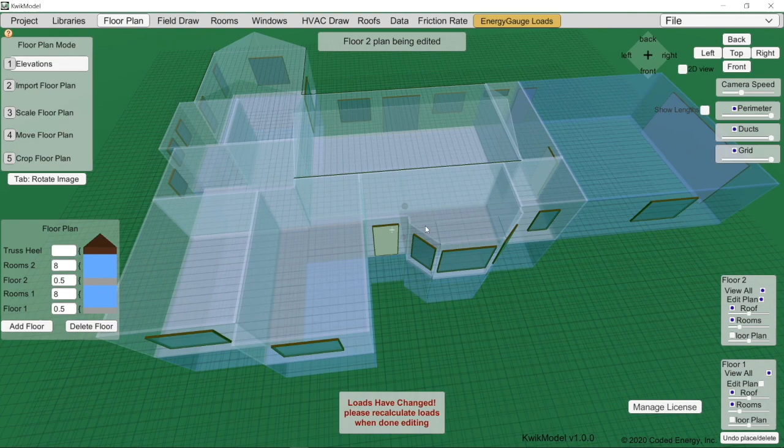The first thing you're going to have to do is place an air handler in the house, and typically a basement system like this is going to have an upflow unit down in the basement. So somewhere down here in the basement there'll be an upflow unit.

The best way to do that, to keep things kind of clean, I'm going to turn off the first floor, the main part of the house, go over here and just turn everything off so we just see the basement. Turn off the grid. Okay, so there's our basement.

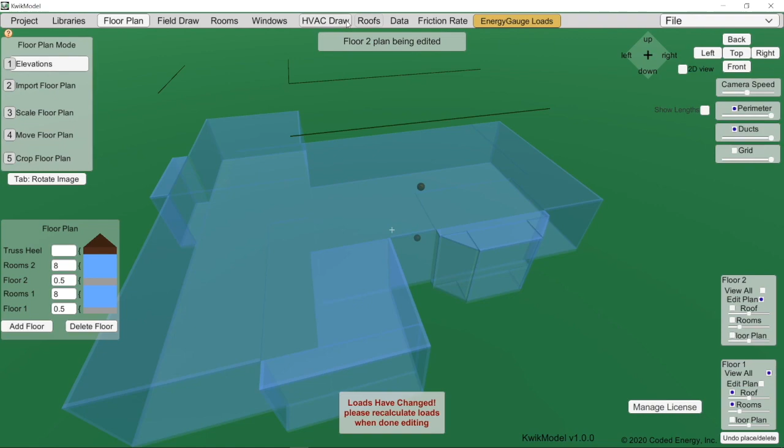So we go here to HVAC draw, we go to air handlers, and we place an air handler here, and it's already designated as an upflow. If it was horizontal when you started, it would look something like that. You can do downflow, upflow, or horizontal, so we'll do an upflow.

There's a button here to move it vertically, and you'll see this green handle shows up there. So you basically just drop it down. I drew this basement with 8-foot height to it.

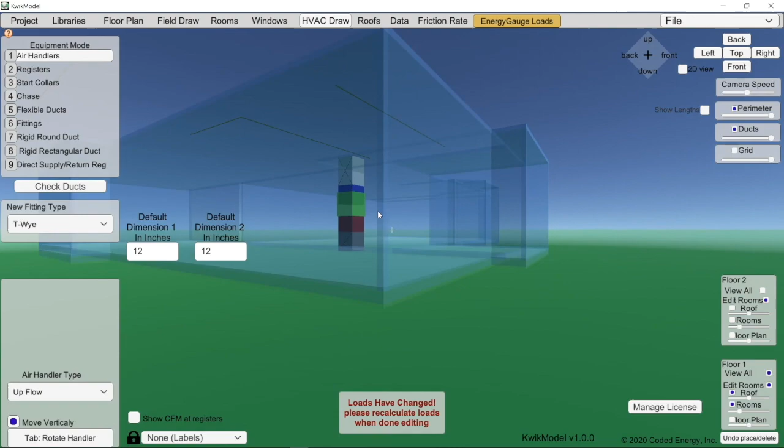We're going to have to adjust some of the parts of the furnace / air handler in order to get it to fit in there. So I'll just do that real quick.

Okay, so we got 24, 30, 18, and 24. Whatever your height is that you have to work with, that's what it is. But the point is you can change those. You can also change the cross-sectional area as well if that 24 by 24 is too big for the cross-sectional area.

Okay, so the way I'm going to do this is I'm going to put a rectangular supply trunk that runs down this way, and another one that runs down this way, and then I'm going to hit all the registers. So once you have the air handler in place, you can run your load calcs and size your equipment, get your airflows and all that good stuff.

Okay, and then once you have all your airflows and stuff, you'll come back and calculate your friction rates and things like that. But I'm just going to show you how to draw your system and the process you would go through to size your system once it's drawn.

Okay, so you come over here and you'll see one of the choices is rigid rectangular duct, and then you have these new fitting types choices here, and there's a whole bunch of choices here. Whenever you insert a new duct, you have to tell it what kind of fitting is going to be on the end of that duct. It can't be just a duct, it has to be a start and a finish.

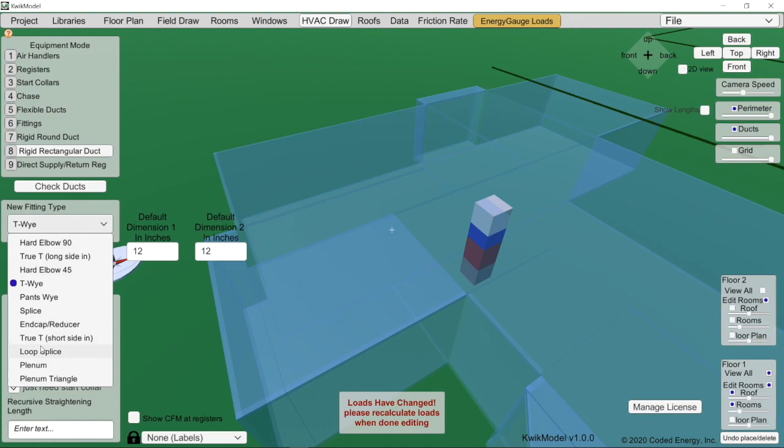And so what I'm going to do over here is I'm going to run a duct out both directions off the supply plenum, and it's going to have an end cap on it. So I'm going to choose end cap.

Okay, and then to come off of a plenum like this, we need a start collar. So it defaults to a round start collar, but you can click on it and change that to a rectangular start collar, and it's going to be 24 wide and 12 high is the duct that I'm going to run down this way.

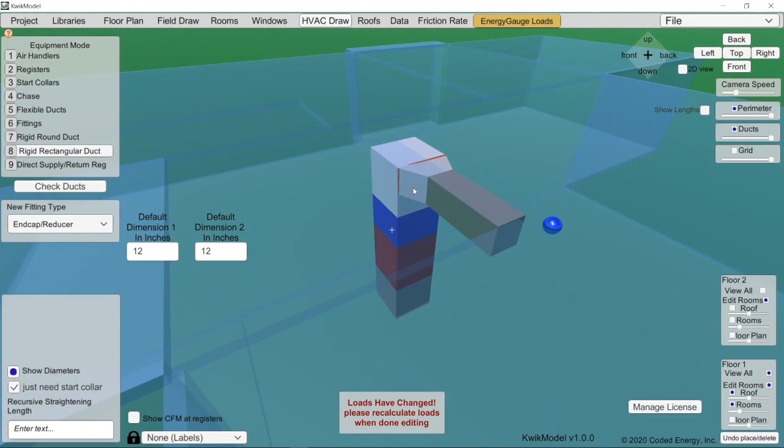Okay, and so once you select that, go back to rigid rectangular, select it, and just hit enter, and then it draws a duct. Now you notice it has a transition on here.

Okay, well this first transition is going to be the same size as the start collar. It's going to be 24 by 12, so we don't really need that. So if we click on that, we can change that to, let's see, 24 here. So there we go. So it's a 24 coming off there.

Now sometimes I've seen where this duct comes off and it goes up into the floor joist or something like that. So that's what these offsets are. So if you want to offset it by 6 inches, you can shoot it up like that. You can change the length of this transition, so that would be down here, transition length, if you only want it to be 6 inches. So you see there it's smaller. Okay, but I'm just going to have these come straight off like so.

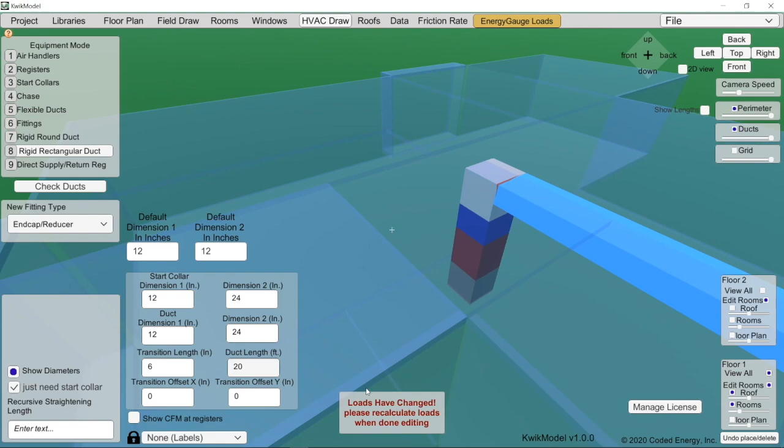Okay, and then there's two ways to extend this duct. You can type in the length of the duct down here. It's currently at 3. I could type in 20 if I wanted to, and it would go out 20 feet.

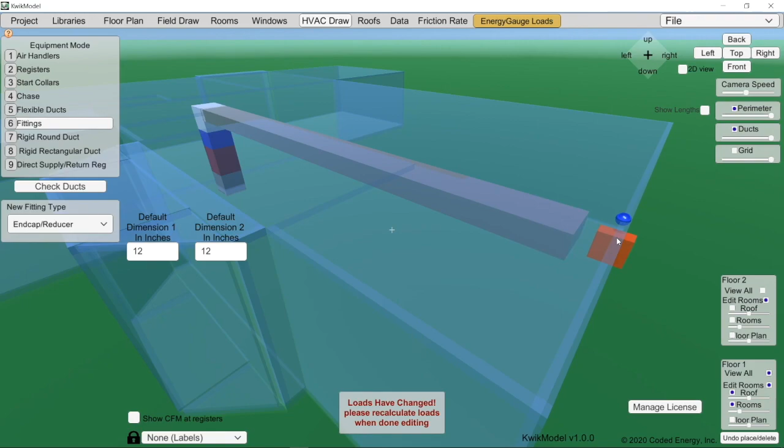But the easier way is to grab the fitting that's on the end. Click on fitting and you'll see this handle down here. The fitting on the end is the end cap. So I'm just going to grab this fitting and drag it out as far as it needs to be, all the way to the end. We can come back and adjust that later. So that's a 12 by 24 coming out this way.

We'll do the same thing on this side. So start collar, Alt click, highlight it, click rectangular, tell it what dimensions you want to be. You can drag it up and down like so. Go to rigid rectangular duct, click on the start collar, we've got the end cap selected, hit enter, change this to 24, and then click on fittings and just drag it out as far as you need to go.

So we have the start of our duct system there. The next thing to do, maybe even before this, is to put in the registers. We don't know where the registers are going to be, I just know I'm going to need this big duct transition, or supply plenum/trunk, going down the length of this house like so.

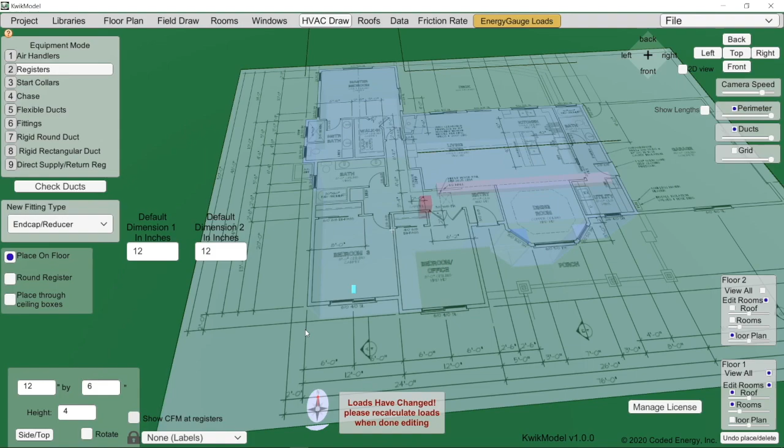So let's turn on the first floor plan so we can see where the rooms are. We go to registers, hit place on floor, so that's going to do floor registers for us, and then Alt click will place the registers. They default to 12 by 6. The size doesn't affect anything in the calculations, it's just a visual thing. And then if you want to turn it, you just hit the tab button and that rotates it.

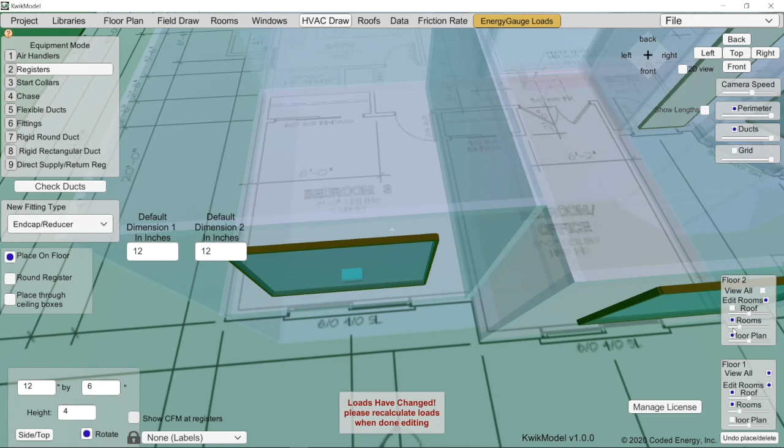Okay, so I'm going to go ahead and put these in. Oh, and by the way, if you want to move these registers, you have to turn on the floors. That's to prevent you from accidentally moving something. So I'm going to turn on the rooms to the second floor. I'm going to lighten the rooms so you can barely see them, and now I can move those registers around.

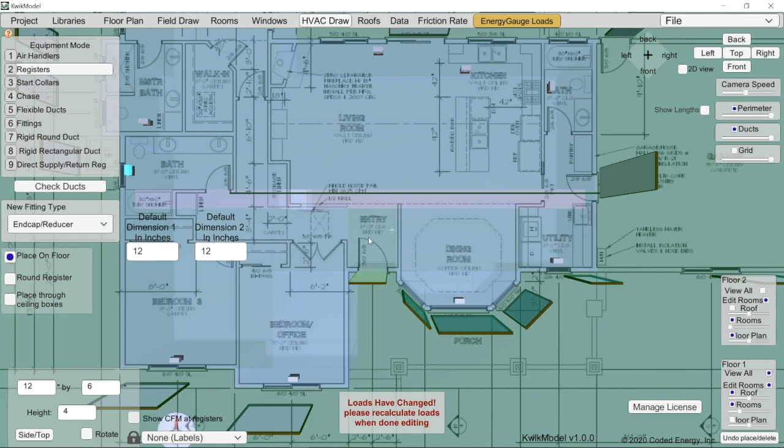Alright, so we got all our registers. I think that's all of them. We could put one in the entry if we wanted to, but actually in this, I have the entry and the dining room lumped together, grouped as a single load, so whatever load is on the entry room is going into the dining room. So there's our registers in relation to our supply trunks.

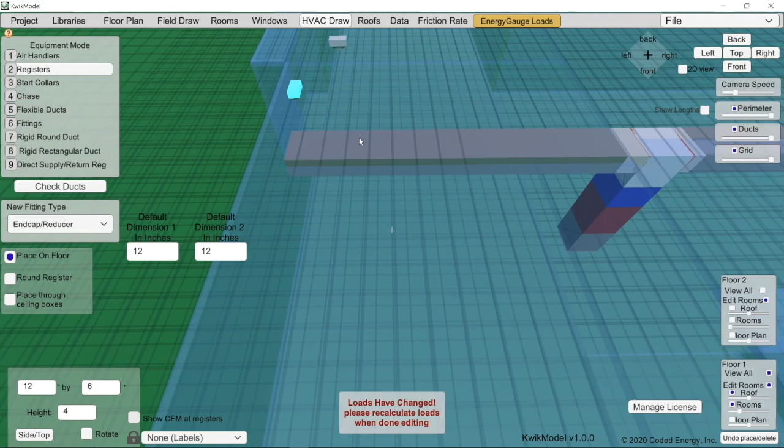And now the next thing to do is to run some ducts out to each one of these. So what I'm going to do is turn on the grid here to help me line things up, and you can see these lines here just give you reference points to the registers.

The way I'm going to do this is I'm just going to put a round sheet metal duct with a hard elbow coming off the top of this plenum and just coming down straight into these registers. Now it's going to hit the registers from the side. So the other thing I need to do before that is you'll notice these registers are bottom entry, straight run, straight into the bottom of those. So we need to change that.

So in register mode, you click on the register and you'll see down here it says side and top in the bottom left corner. You change that and it puts a side entry register like so. Now if we hit tab to turn it towards the direction we need it to go, what we need to do is change the dimension. Instead of 12 by 6, it needs to be 6 by 12. Okay, so there's the side entry.

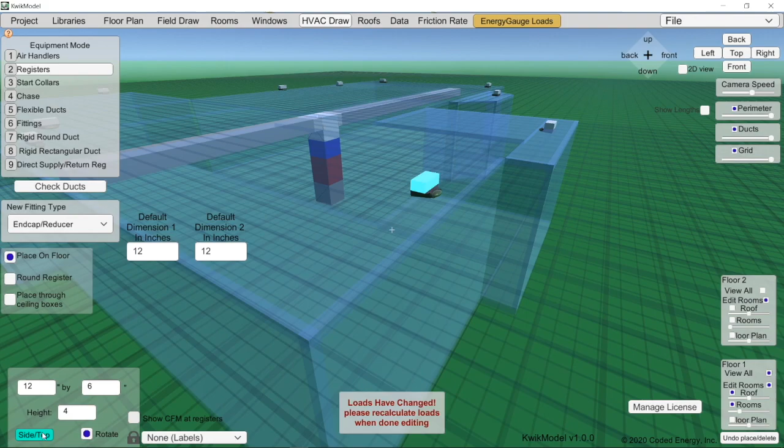Okay, so I got all the register boots pointed in the right direction so that I can just run the ducts off here and go straight into those. Alright, the next thing I'm going to do is I'm just going to put start collars along the top of this supply trunk, lining up with each one of those.

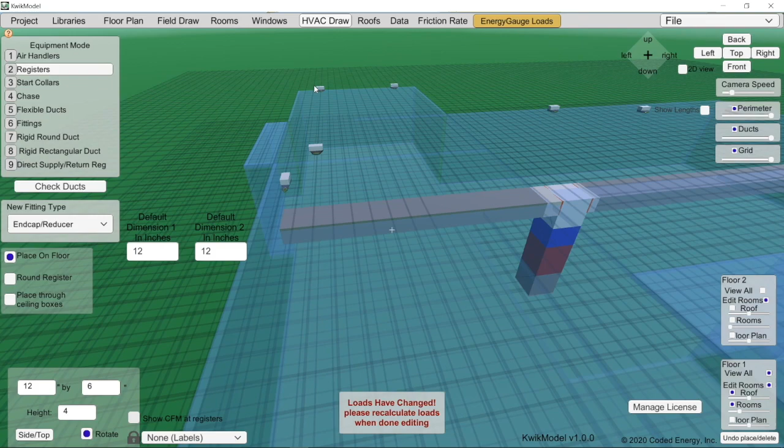Now you notice this duct and this duct are in direct line with each other, and that's probably not going to work. So I think I'm going to move this one over just a tad. It doesn't matter which one you move. The point is that you're going to need to run two parallel ducts alongside each other. So I'm just going to move these in just a little bit. They probably want to have those be symmetrical in the room. Okay, so those look good.

That one. Okay, so let's do the back side of the house first. So I'm going to go to Start Collars, and I'm going to put my default size as a 6-inch, either 6-inch square or 6-inch diameter, just so they're not so busy. So Alt, place, Alt, place.

Let's look at the front now. So this guy, that one lines up with the top of the plenum. We probably don't want a duct coming off here. So a couple things we can do. We can either slide the air handler to the left or the right, or we can slide the register to the left or right. And because it's easier, I'm going to slide the register over.

Okay, so all of those, and you notice I put them on one side or the other. So if they're in the back of the house, they're on this side. If they're in the front of the house, they're more towards the front. That just kind of helps me see which direction it's going to go.

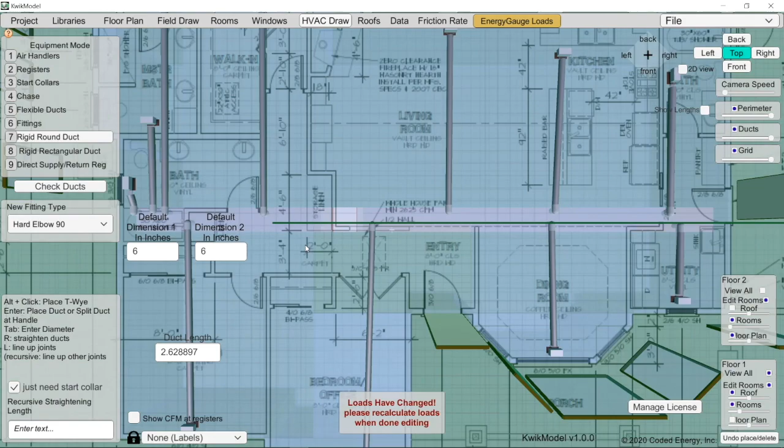I'll turn on the floor plan, and you'll notice that the furnace is right below. If I look straight down from the top, the furnace is just off to the side of this thing that says linen storage right here. So what it is, it's a cabinet in this hallway, and in the bottom face of this cabinet is going to be the return grill in this hallway. So you see my furnace is off just a little bit.

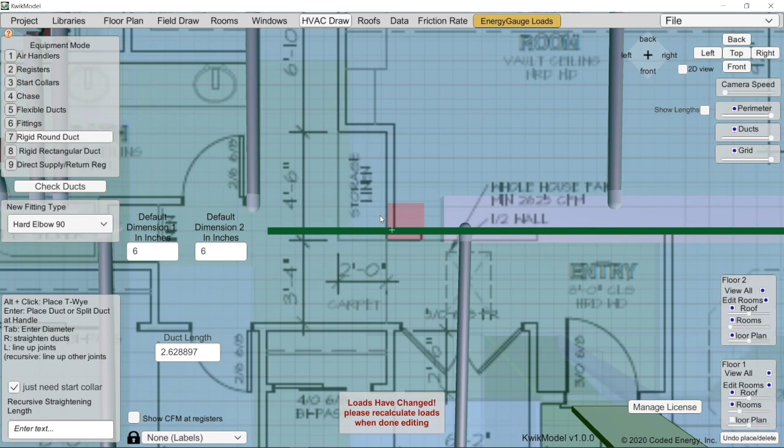So there's a couple ways I can do that. I can slide the furnace over if that's doable in real life, or I can just have my sheet metal come off and make that transition to come up, because I'm going to come up through the bottom right here and put my return in the face on this side here. So let's see which one works. So I see it needs to go up 1, 2, 3, and over about 2, or just slide this over about 2 feet. So let's see what that does.

So I click on air handler. If I click on it, it highlights, and I can drag the whole thing like that. But you notice what it does is it pulls all the ducts with it. But that's not a horrible thing.

So let's fix it real quick. The way to move a connection like that, I click on fittings, grab the handle and just slide it over. Then to move these individual ducts, I click on Start Collars, and if I click on it, it'll jump right back on there. But all these other ones, I need to slide them over, and I can use the grid lines to get them lined back up.

So that's probably the easier way to do it. The moral of that story is to make sure your furnace is in the right place before you place all your ducts.

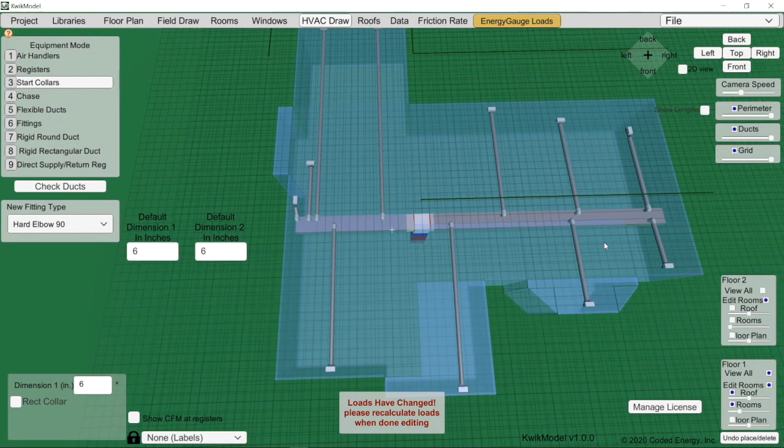So obviously the assumption is that this big supply trunk is running underneath the floor joist, and these ducts are jumping up into the floor joist and running towards the front and the back of the house. Okay, hopefully I got that furnace lined up good. I should have checked it before I fixed everything, but live and learn.

So we got the furnace lined up under the floor plan of the second floor, and what we're going to do is have a return come off the bottom of the furnace, come over, and then come up into the bottom of this linen cabinet here, so that's where the return grill will be in the hallway. Alright, let's draw that.

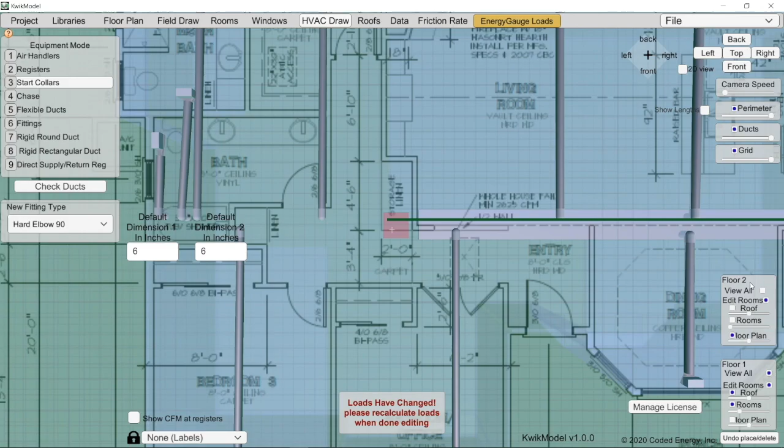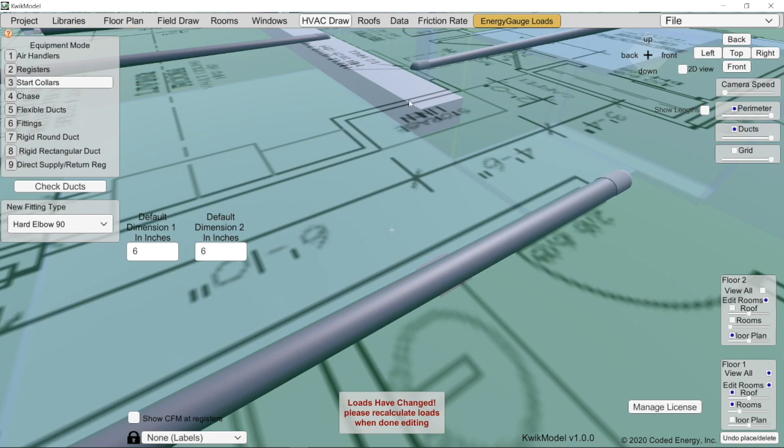So the duct's going to come off the bottom, and then go up through the floor and penetrate up, right above this thing here, it'll come up, so if you're walking down this hallway, there'll be a return grill right in that face there. So let's draw that.

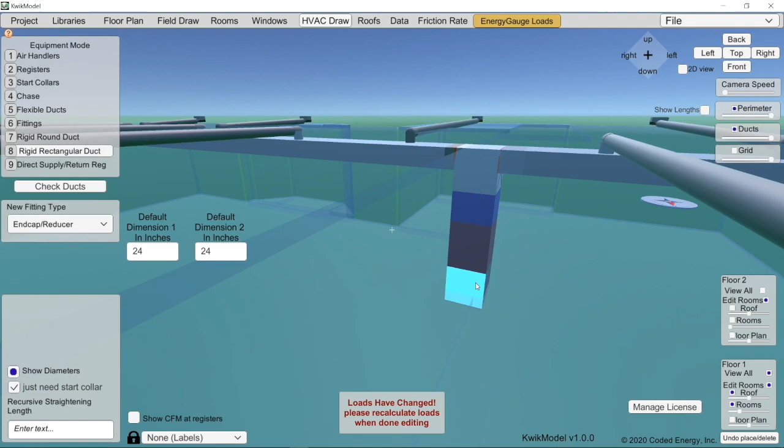The best way to do that is with a series of rectangular rigid ducts. So I click on that, make sure that end cap is chosen, and then I'm going to set the default dimensions to 24 by 24 because that's what everything's going to be. Then I'm going to put a start collar right here, click on it, tell it it's rectangular, click on rigid rectangular, highlight the start collar, hit enter, and it comes out about yay many feet.

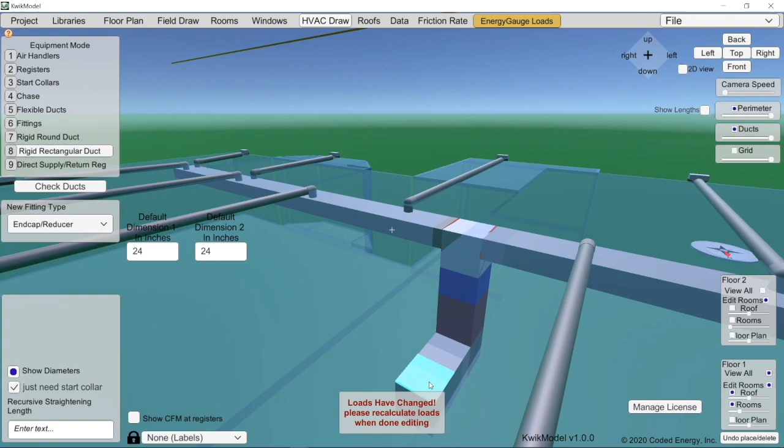Okay, the next thing is let's put another start collar on top, start collar there, highlight rectangular, rigid rectangular, highlight, enter, and then it comes up.

Now if we click on fittings, grab that end cap that's on the end of here and just drag it up through the floor to the second floor like so.

Now that return is going to be right in the face there, and we have this thing called direct supply and return, and that's when you're putting a supply and return right in the face of a duct, usually a rectangular duct. I'm going to highlight that, alt click, and it's a little guy. If I highlight it, now I can specify the height and the width and all that good stuff.

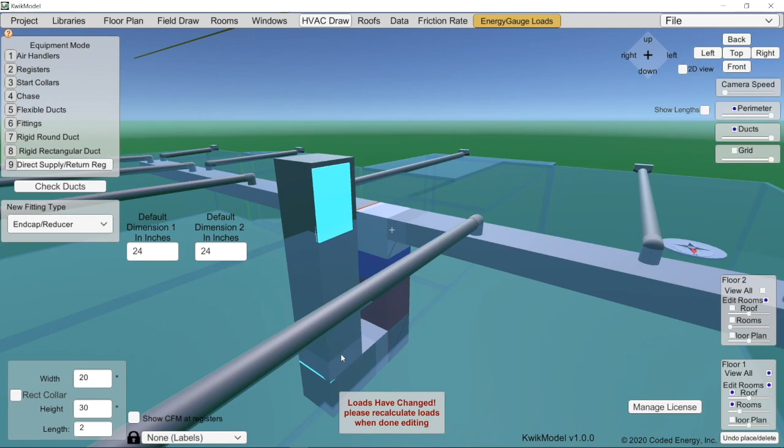So this is going to be a big dude. Now I'm going to make this as big as I can. I'm going to call it 30. So it's going to come up out of the floor 30 inches. It's going to be the whole bottom of that cabinet down there. That might be a little optimistic on that, but you do what you can do.

So go back to fittings, grab it, pull it up so that's all the way through the floor like so. I can highlight that return, pull it up as high as I need to, put it anywhere I need to go. So you got the basic idea. It doesn't have to be perfect for this. We're just designing a rough design, sizing the ducts. The nitty-gritty details will happen in the field as is typical, but this at least gets you pretty darn close.

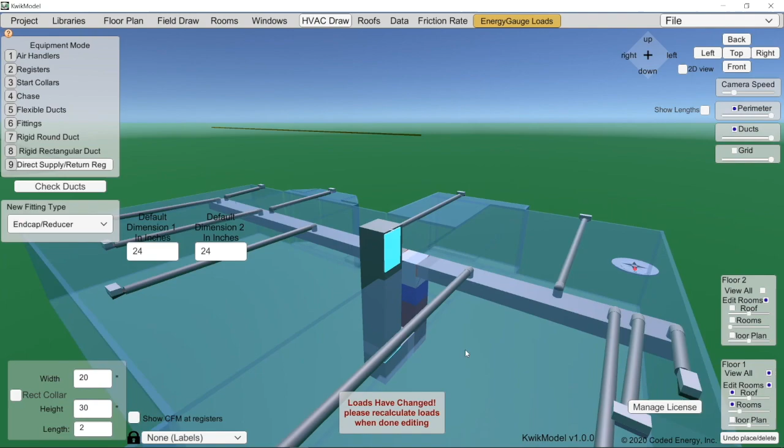Okay, alright, so there we go. That's return, supplies. Let's look at it from the front. That looks pretty good. Now the sizes of all these are going to change when you do your load calcs and all that good stuff.

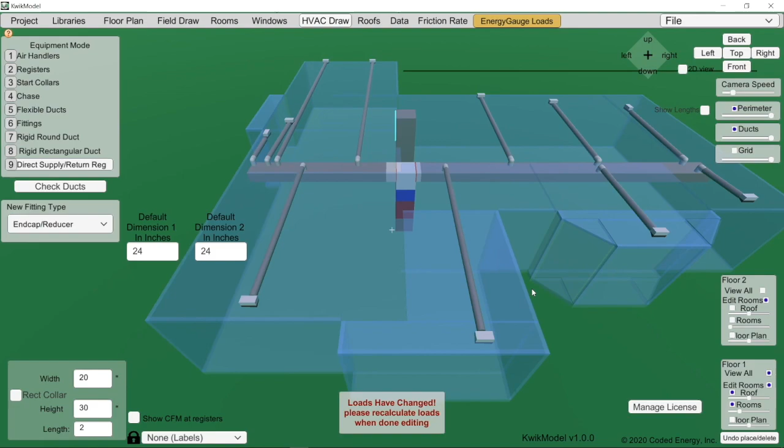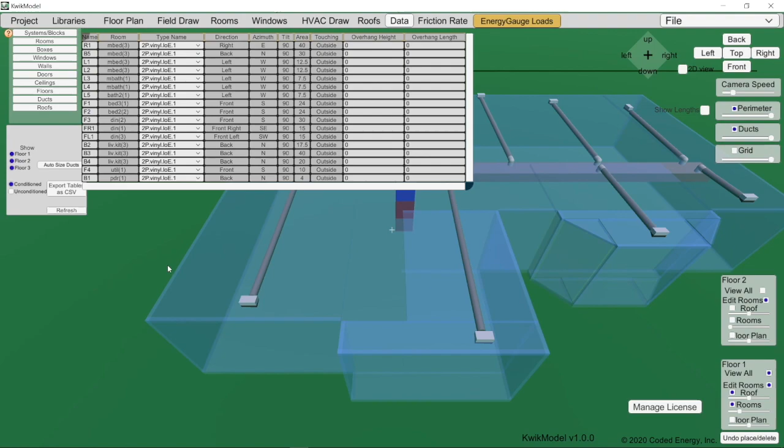Once you do your load calculations and select all your equipment, which is covered in a different video, the next thing to do is come into your duct table and calculate all your friction rates.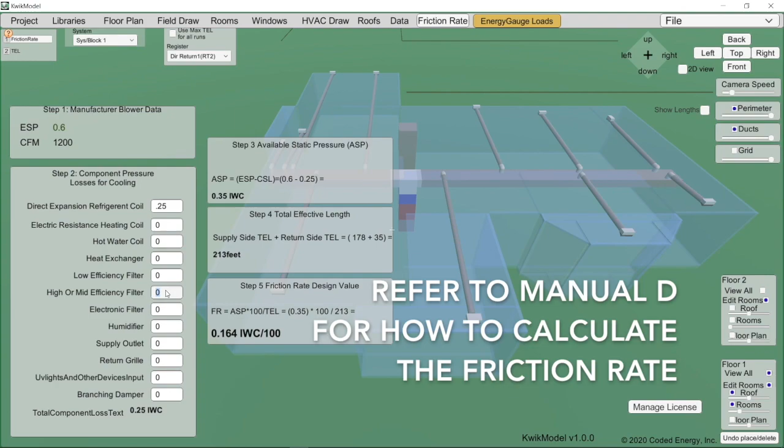We specified in the manual S portion that we have 1200 CFM at 0.6 inch static pressure, and now we have to put in our various losses. You'll have to look these up, but I'll just throw some numbers in there that are fairly typical.

So that's all our static pressure. We started with 0.6, and we have all these fittings, accessories, the coil and everything that takes away from that 0.6. We're left with 0.41. We come here, we have our external static pressure minus our component static losses, 0.6 minus 0.41, and we're left with 0.19 as our available static pressure.

Now the next thing to do is figure out the total effective lengths. So we click on the TEL table, and the software does a good first best guess at the fittings as you've drawn it. It knows there's a register boot, a hard elbow, and a length of duct. There are some things it doesn't know, so you'll need to click on each run.

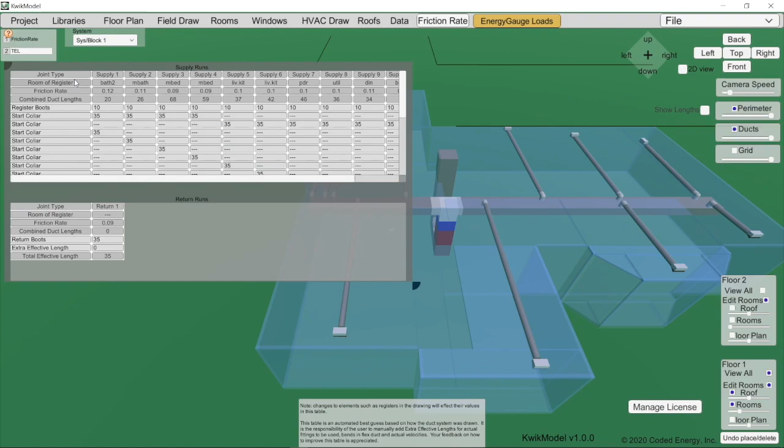This first one is supply 1, that's that register there, and you see the air goes through this duct and out this trunk here. So we have to start here and calculate using the Manual D total equivalent lengths appendices. We calculate whatever the loss is here, whatever the loss is there, and so on.

So you just go through and add these all up. I don't have time to do that in this demonstration video, so what I'm going to do is go in and throw in a bunch of extra lengths here. All of these numbers are editable, so I'm just going to put 100 in each one of these for unforeseen total equivalent lengths. In an actual project, you're going to want to be more precise with that, as necessary.

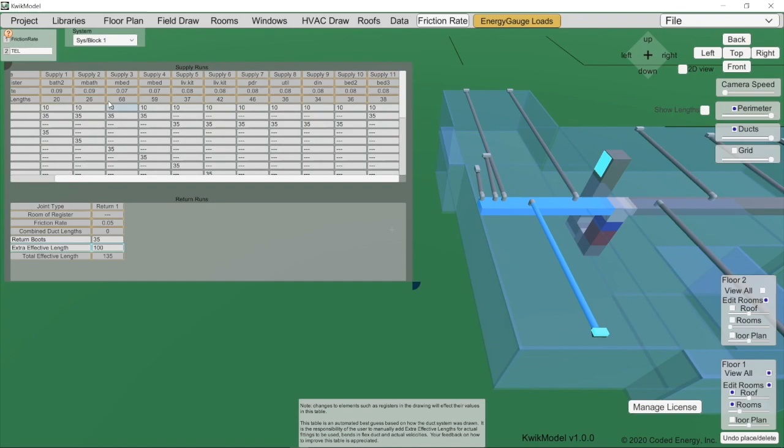If we look at our calculated friction rates, 0.09, 0.09, 0.07, those are all reasonable. If they get below 0.06, you want to be a little concerned. You may want to pick a different furnace that has a higher available static pressure, things like that.

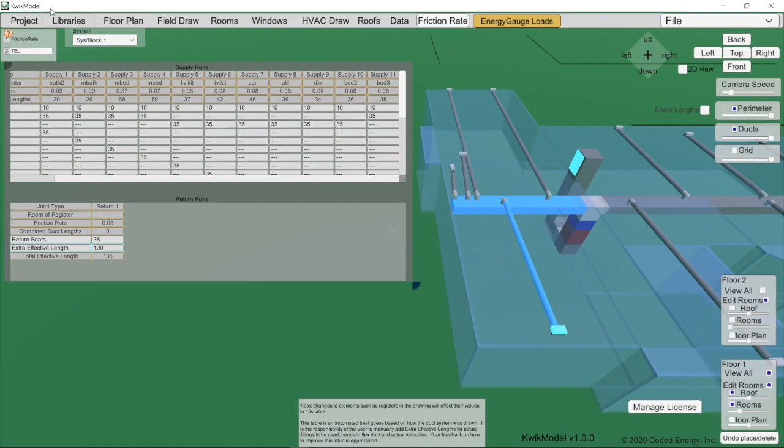But this is just an example, and you can kind of see the thought process that goes into this. So we got all our friction rates, let's go back to the duct table, which shows all our friction rates right here, and we hit the magic auto size ducts button.

Now watch what happens to these numbers up here when you've got this many CFM here with this friction rate, it's going to size these ducts for us. A little window pops up warning that rectangular duct auto sizing is not implemented yet, so rectangular ducts must be sized manually. We have not programmed into the software the ability to auto size these ducts.

There's just too many personal preferences, too many situations where you're driven by the available size of duct that you can purchase, and so on and so forth. So for now this is going to be a manual option, and I'll show you how to do that in just a minute.

You'll notice that some of these change. We started off with all 6s, and now some are 6s, some are 8s, and some are 7s. This is the diameter of these ducts running out here. If you want to see which one is which, just click on it. So that's a 6-inch there, 6-inch, 8-inch, 8-inch, 8-inch, 8, 7, and so on.

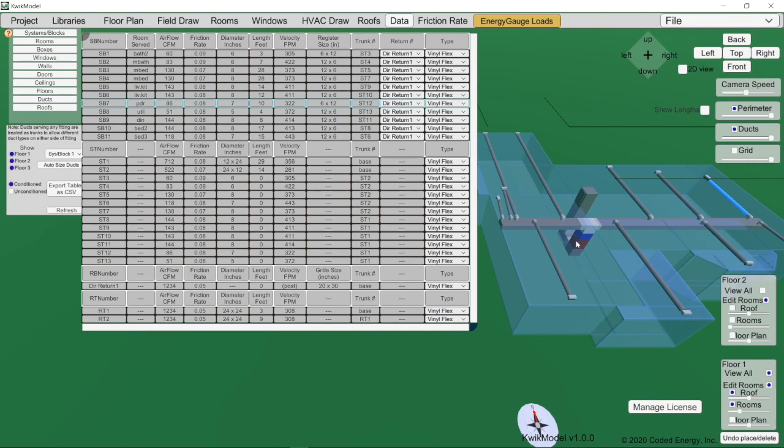We've got some rectangular ducts here, and the way the software works right now is that technically there's a very, very small duct coming out of here.

So do notice this note up here. It says ducts serving any fitting are treated as trunks to allow different duct types on either side of the fitting. So what we had to do was call this little section here a trunk so that it could be treated differently, in case for some reason you wanted this section rectangular coming up into this fitting and then round coming out.

If we called this one duct, you would not be able to use different sized ducts, or different types of ducts I should say. So you may want sheet metal coming in and flex coming out, and the only way to do that was to call this a trunk and this a branch, even though technically that's not the definition of a trunk and branch, but that's how it's treated here.

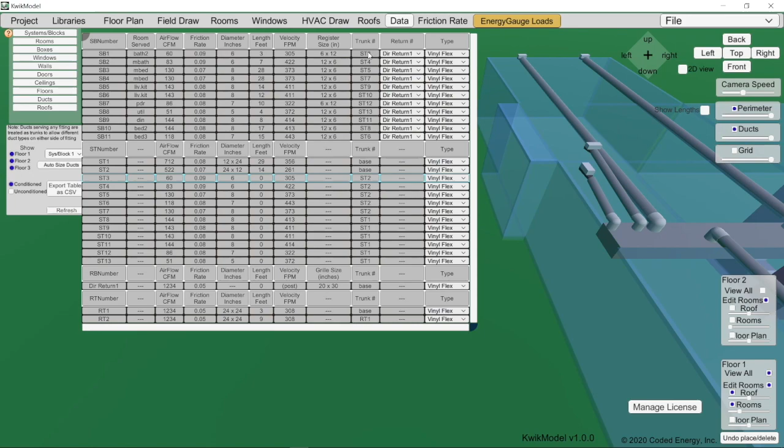So this is this little trunk right here. ST3 is served by ST2. SB1 is served by ST3. ST3, if you click on it, you can't really see it.

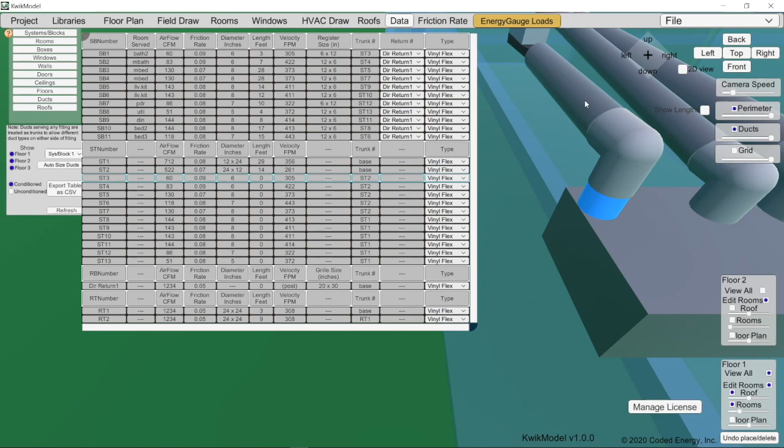Let me show you how to find it. If you go back to HVAC draw, fittings, click on this and raise it up. Data, ST3, there it is, it's that little guy there. So the reason we treat these separately is just so you can make that a different kind of duct from this one if you needed to. That was the best way we figured out how to handle this.

Okay, so back to the duct table. So as far as the rectangular sheet metal ducts go, what you can do is break these into sections so you can figure out how much air is passing through this.

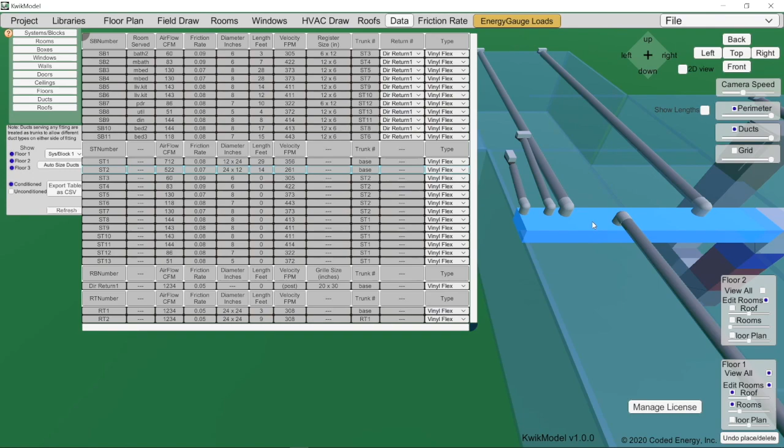Say, let's put a reducer here. You can figure out how much air is passing through here, and through here, and you can put reducers there if you want to. So let me show you real quick how to do that.

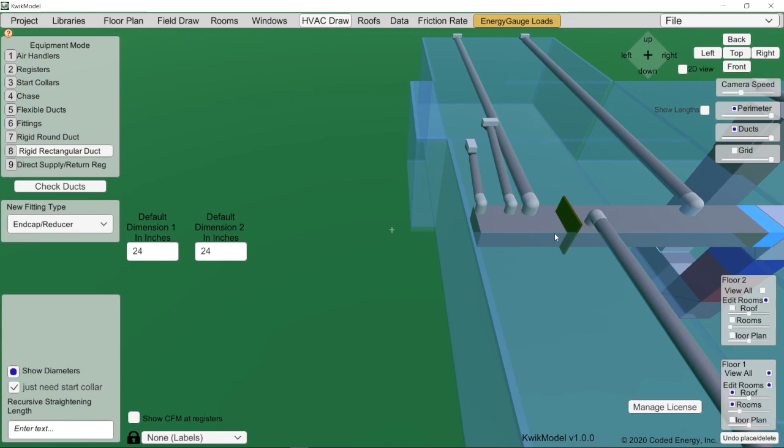Use the Alt click key, and it puts this little slice through there. Okay, so you choose end cap reducer right there, and you hit enter. You can see it inserted this, it looks like a fitting here. It's just a reducer. At this point it looks like a splice because these two ducts are the same size.

But if I come in here and click on rigid rectangular, it highlights that duct, and then I can change the size. I can change the dimension of the part that's attached here, I can change the length of this fitting, and I can also change the dimension of this flex duct down here. So down here at duct, it's 24 by 12.

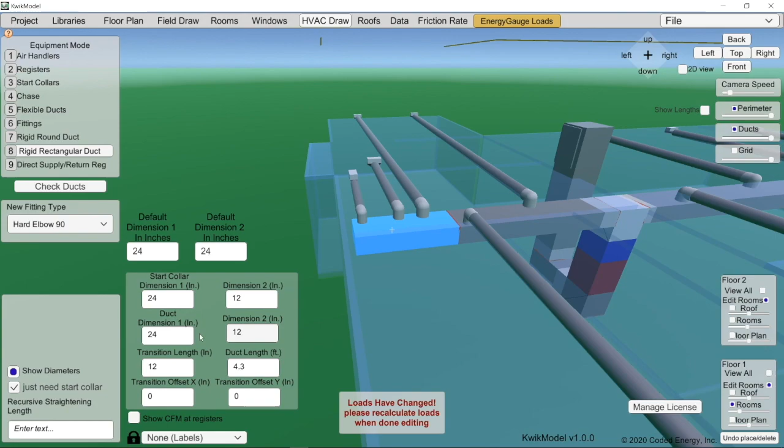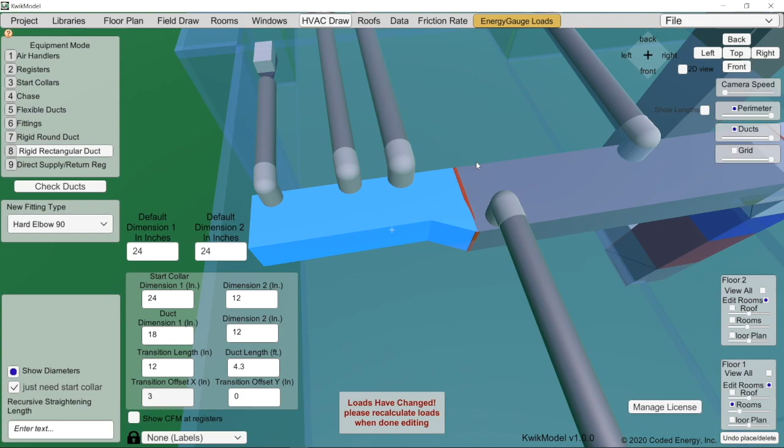If I change that to 18, you can see it put a little reducer in there, and it reduces it down the center by default. But if I wanted to scoot it to one side or the other, I can do it down here like so, and you see that lines it up. I just shifted it back 3 inches because the difference is 6, so I shifted it back 3 inches, and so the back is lined up.

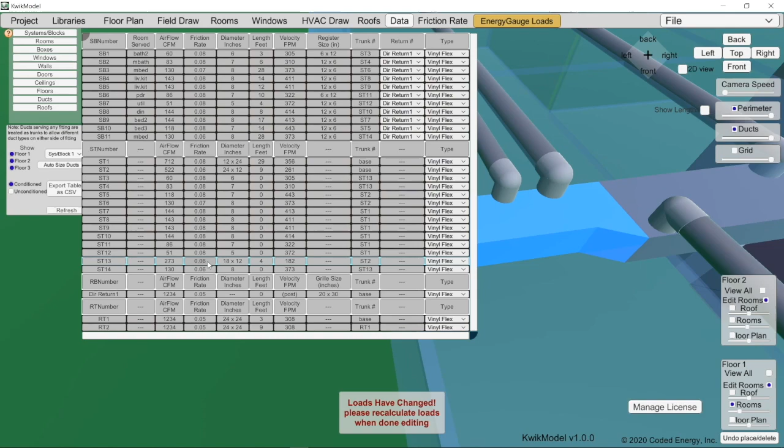Okay, now as far as the size goes, 18 by 12, you'd have to look and see. So you go into data, go into ducts, and then you find that duct by clicking on it. So it's this guy here, 18 by 12, so it's 273 CFM at 0.06. So you can use a good ductulator with a round to equivalent converter and calculate to see if that's correct or not.

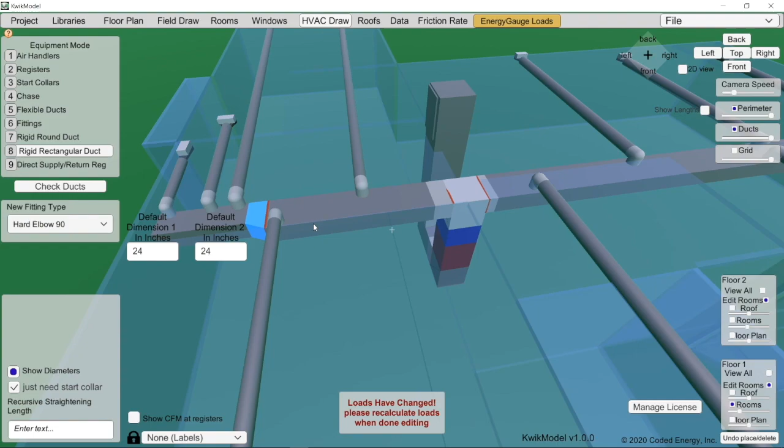Okay, so now if I want to actually come in and size these rectangular ducts, I'll kind of show you the process that I'll do. You can look at each point and see how much air is going through and whether the duct can be downsized or not by going into the data table, the duct table, and then just clicking on different sections of the rectangular sheet metal duct.

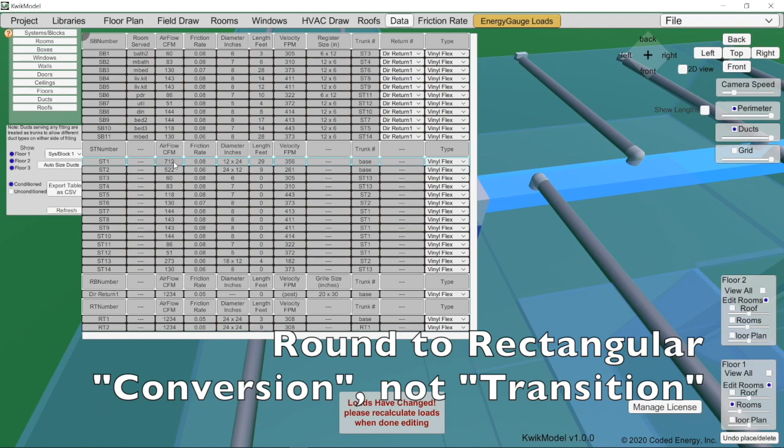So this one here has 712 CFM, so I'll go in. It's currently at 12 by 24 dimensions. I'll put the 0.08 friction rate right on the 712 CFM number, and then I'll look at the rectangular to round conversion. Again, it's kind of personal preference, and what kind of materials you have available as to how many reductions. So I'll just kind of do that real quick and show you how it's done.